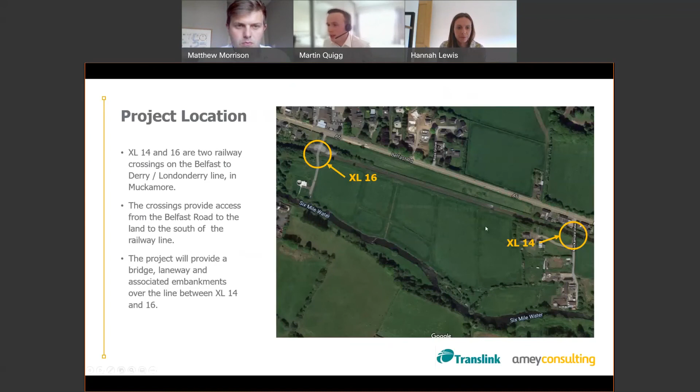This project will provide a bridge, laneway and associated embankments over this line between XL14 and XL16.

To give you a bit more information on XL14, it currently serves 4 residential properties, horse stables, a commercial yard, and just under 20 acres of farmland.

XL14 is a bit of a unique crossing to the network in that it provides warning of the train via a level crossing predictor and miniature stoplights. You can see the 2 photos below, one either side of the crossing. There are also user worked barriers that combine with these lights and the crossing predictor.

As I said earlier, there have been numerous near-miss incidents at this crossing over the years. Basically, the issue is that although the traffic lights go red when there's a train approaching, there still is the possibility that you could use the barrier to cross despite the red light showing. So there's an obvious safety concern, especially for people who aren't familiar with the crossing, be it visitors to the houses or delivery drivers.

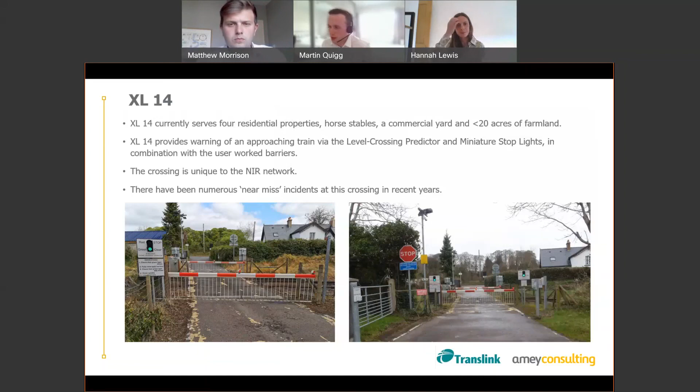XL16 is a bit different in that it's a more private access, mostly serving the Northern Ireland Waterworks to the south of the Belfast Road, and also providing access for Northern Ireland Railway staff to the line. The crossing is locked off by the access gates you can see in the image to the left. Currently, if you want to cross the railway there to access the Northern Ireland Waterworks, you have to use the fixed telephone, which you can see to the left.

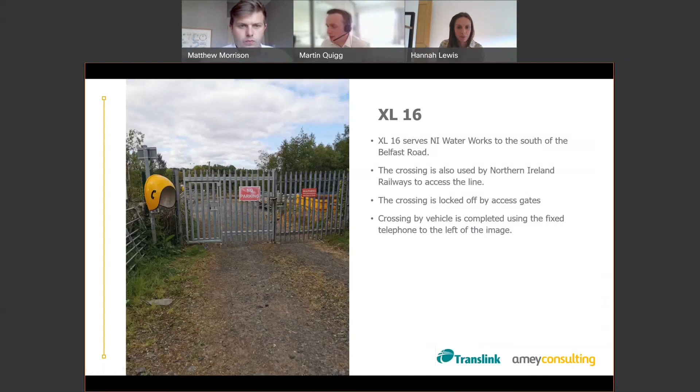So, for example, if there's a train coming within the next 5 to 10 minutes of the user ringing up, they'll be told they have to wait until that train passes before they're allowed to cross. So it can be a delay to those looking to access the Northern Ireland Waterworks.

So our proposal is to provide an alternative access over the railway line by construction of a new bridge, which you can see in this location here, along with a laneway and embankments, towards the east of the site, closer to XL14 and Muckamore View, which you can just about make out the tail end of, just over there to the right of the image.

So basically the idea is that you come off the Belfast Road and turn up, climbing all the time here before you cross the bridge, and then turn down here. At this point, the road splits into two, where you can go straight on, which provides access to the residents at Muckamore View, or turn right, where you have access to all the individual fields for the farmland. The lane then continues on up to provide access to Northern Ireland Water to the west.

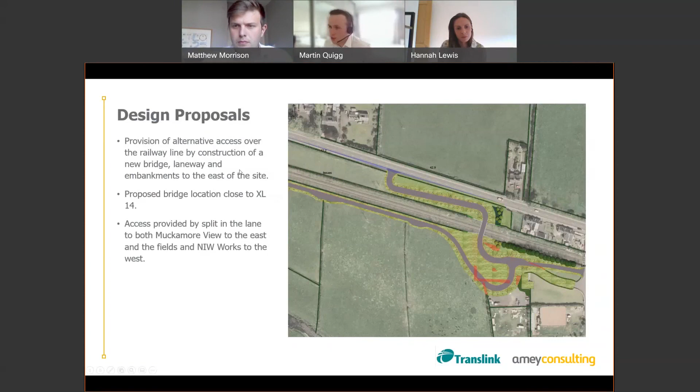So we've pulled together some images for the project to try and give you a bit of a feel for what it's going to look like. This is from the east of the bridge, looking west up the Belfast Road.

Try to give you a bit of a feel here with some arrows. You've got the heading towards Antrim there, and this lane then takes you up towards XL14. Say you turn off the Belfast Road and turn up, you're climbing here all the time. Basically, the requirement there is to provide the clearance from the railway line, the safe clearance from the track to the underside of the bridge, to allow the railway services to pass without any issues.

And as I said, you've split there to XL16, and then Muckamore View towards the east here, or the bottom of the image. You can see that XL14 will eventually be closed as part of the project, as will XL16.

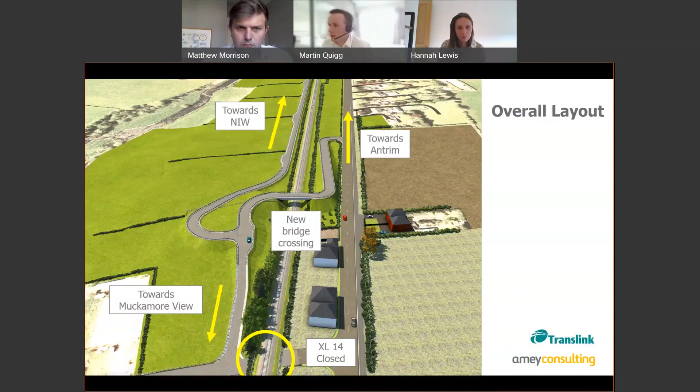So then just a few more images. This is looking east from the start of the lane, a bit of a bird's eye view. You can see some details to point out: there's stockproof fencing at the top of the embankments on either side, and also VRS barriers provided in front of those where needed. By that I mean where there's a bit of a drop from the top of the embankment down to the field, so you can see where the lane starts to level out over at the top here, the VRS stops because there's no requirement for it at that point.

Now's probably a good time also just to mention the bridge there. You can see in the background it's about an 18-meter reinforced concrete bridge with pre-stressed beams.

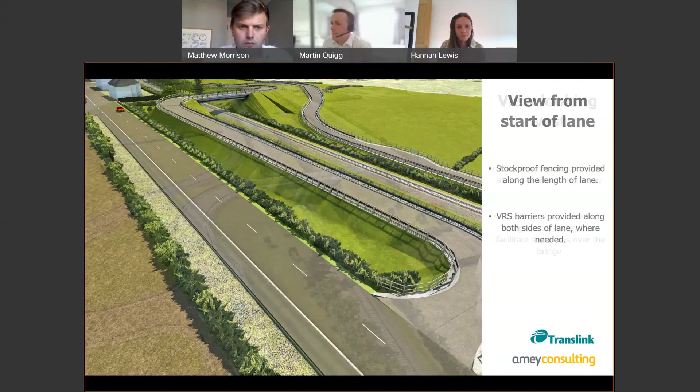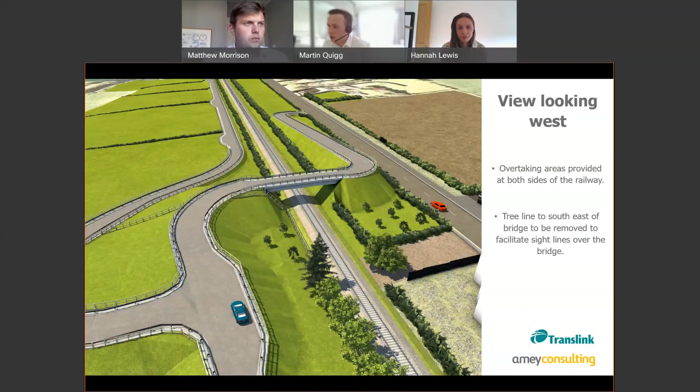Then probably a more common view from the user on the Belfast Road heading towards Antrim. You can see here the large embankment works that are required. These are earthworks embankments with reinforced slopes used at the steepest points, basically meaning everything to the north of the railway line, because it's quite a long narrow field there. You don't have a lot of room to climb up, so these slopes end up being very steep, and we've no room to grade them out like we normally would.

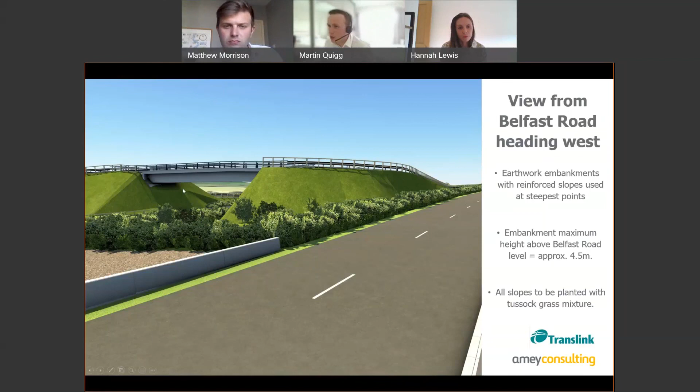For example, that's a 70-degree wall at the very steepest point, where it's about 4.5 meters from the Belfast Road up to the lane level there. All these slopes are to be planted with a tussock grass mixture. Just one thing to highlight on that image is where you see a grass bank just in front of the bridge there - that will be a reinforced earth wall. I'll show you a similar example from another project in a couple of slides' time.

Then a similar view heading east up the Belfast Road. This is a view as you'll be starting to come up the embankments towards the bridge, so you have an approach incline of about 4% as you climb up, where you have to provide - dictated by the clearance from the railway to the underside of the bridge - a minimum of 5.3 meters per railway standards. That lane, as you can see at the near side, is 6 meters, and the lane width over the bridge is about 4 meters.

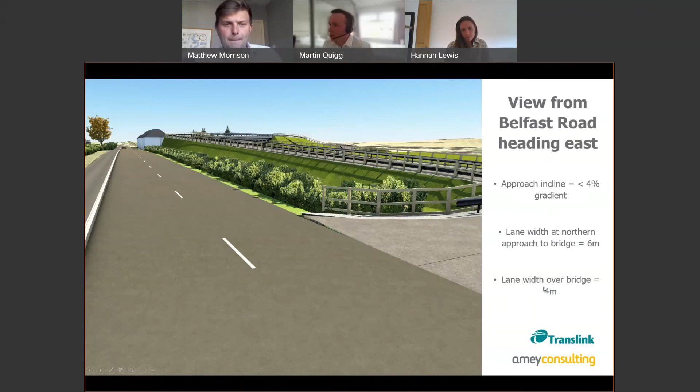So this is a similar structure, albeit in a much more rural environment, where they have provided a reinforced earth wall in front, and that is similar to what we're providing, just right adjacent to the railway line for ours.

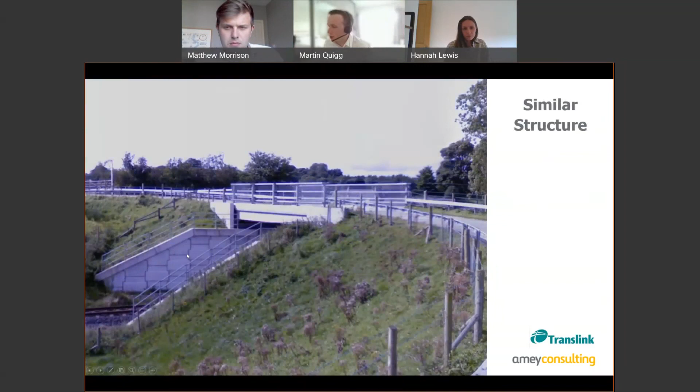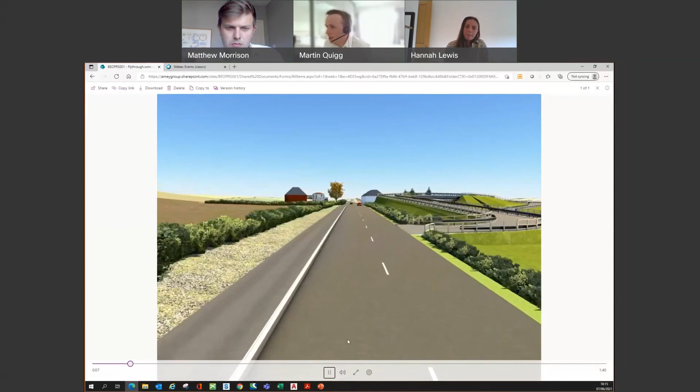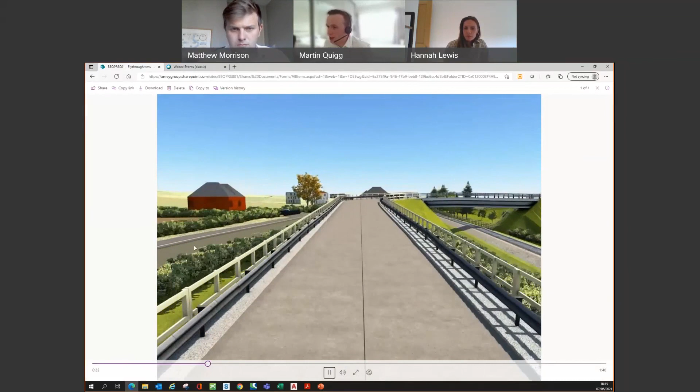That then gives me an opportunity to bring up the fly through we have provided for the scheme, about 1.5 minutes long. I'll let this run through. This is you heading east up the Belfast Road out of Antrim, then you turn up and get a feel for how you've got the 4% incline there. You're quite quickly climbing up adjacent to the Belfast Road, and you can see the existing railway line down to your right, and the barriers and stockproof fencing.

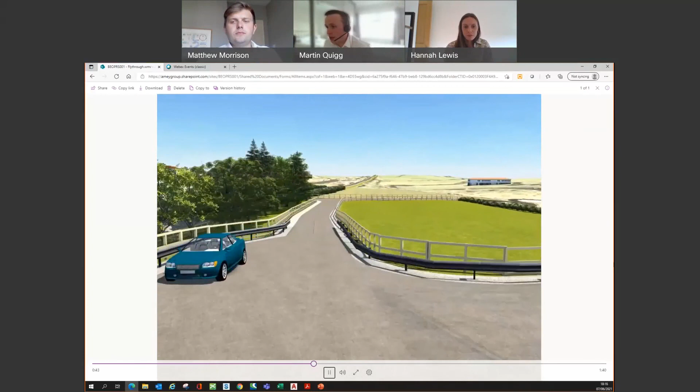So then you cross over the bridge, 4 meters wide, with 0.5 meter verges either side. At this point is then where you've got the split, where you've got the choice of heading right down towards the fields and the Northern Ireland Waterworks, and this will be the more commonly used path, heading towards Muckamore View.

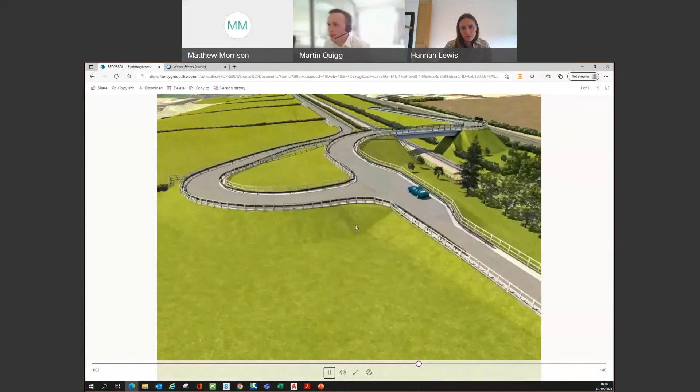This is just a bit of a general fly through. You can see looking westbound here. And you've got all the individual access to each of the fields and the road all the way up to the Northern Ireland Waterworks.

Yeah, that's basically it for that.

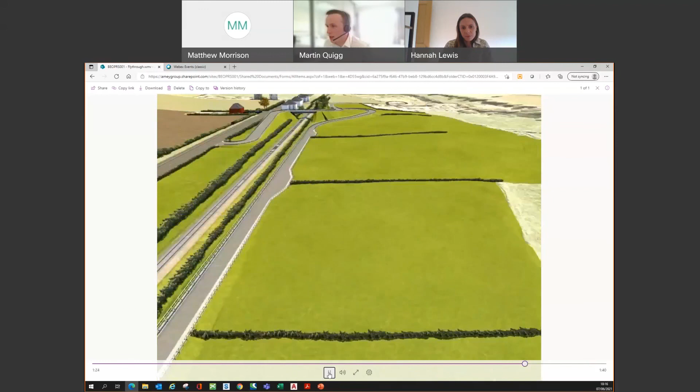A bit of a program for how things are happening going forward. We have bat surveys happening on an ongoing basis at the moment, and they'll be happening right through until October, if my memory serves correctly. That's because there's a number of houses at this point that are derelict at the moment, for any of you very familiar with the area, so those are to be demolished as part of the scheme. Initial surveys indicate that there are bats there, so we're trying to get a feel for how many, and what mitigation measures we'll have to put in place going forward as part of the final planning application.

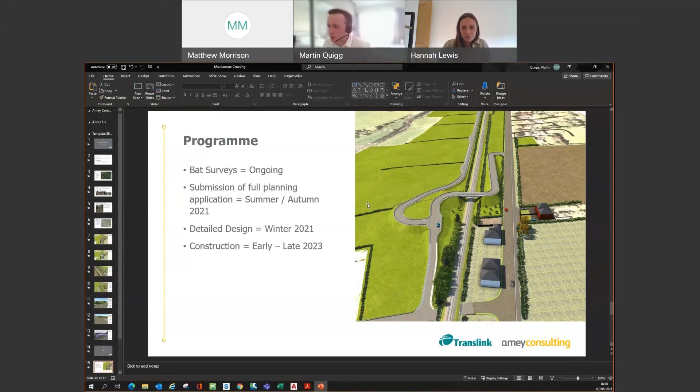As for the full planning application itself, it'll probably be end of summer, start of autumn this year, and we hope for a decision maybe early 2022. We ourselves will be completing our detailed design towards the end of the year, probably just before Christmas, aiming to finish up in spring 2022, with a view to achieving funding and then starting construction in the beginning of 2023. Construction, to give you a feel - it's sometimes hard to put a number on these things - but based on similar schemes, is probably to be in and around 9 months.

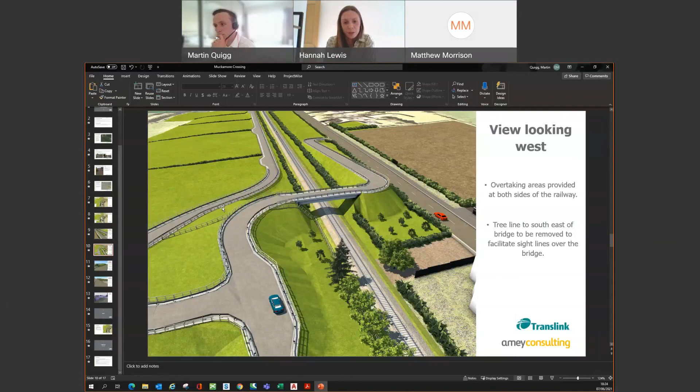Maybe that's one for you, Hannah. Yeah, it's probably something that we can have a look at and talk about the kind of requirements as we move forward into the detailed design stage. Obviously there's a number of users of the bridge, so there'd have to be some sort of consensus there as to who takes ownership and liability for that. So that's something we can maybe look into at the detailed design stage. Just because there's so many users of that area, it might be hard to determine where that liability stands or sits.

Yeah, that's fair enough. Well, look, we'll get in touch with you after this webinar to discuss that with you, because it's something worth working out at this stage while we're consulting with you and preparing for the planning application.

Yeah, absolutely. It's something I had thought about for the farm access and the Northern Ireland Water, but I hadn't necessarily considered for the residents. But as you say, Matthew, I think it's probably worth a bit of chat, and we can see if we can work something out on that one.

Yeah, and as I said, Neil, I'll actually be down and hope to get down to Muckamore View over the next week or so. So maybe if we can have a conversation then, I think that would be quite good.

Just see another question in here, just regarding the slipway or the road, and why does it not rise westwards towards Antrim, and why does it rise eastwards kind of towards the listed buildings? Just concerned about the listed properties there and the bridge beside them. So Martin, maybe if you could answer that one.

Yeah, I suppose this initial layout has, well, historically the reason for it has come just from landowner negotiations. So there's one family that own the fields basically either side of the Belfast Road, nearly the entirety of the site, other than this area here, which is Translink owned. This is the option we're planning at this stage, because it's the option we've developed in liaison with the landowner in terms of what's doable and appeasing him to a point where he's content for this to happen on his land.

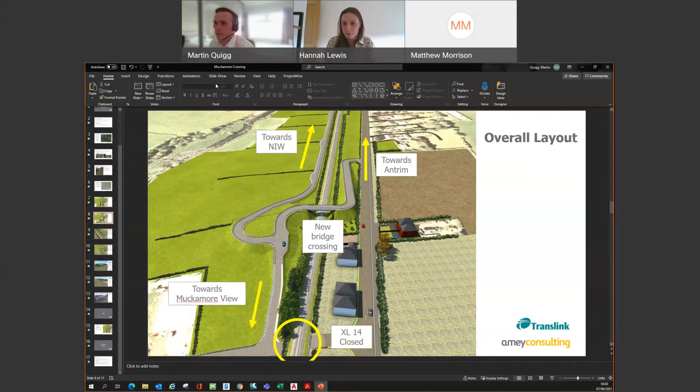I suppose the webinar has been taken forward as the pre-application consultation, and there'll be a further round of consultation with the council for all local residents whenever this has been submitted to Antrim and Newtownabbey Borough Council. And I guess if there's anything else, you can get in touch with us via the email or the phone number.